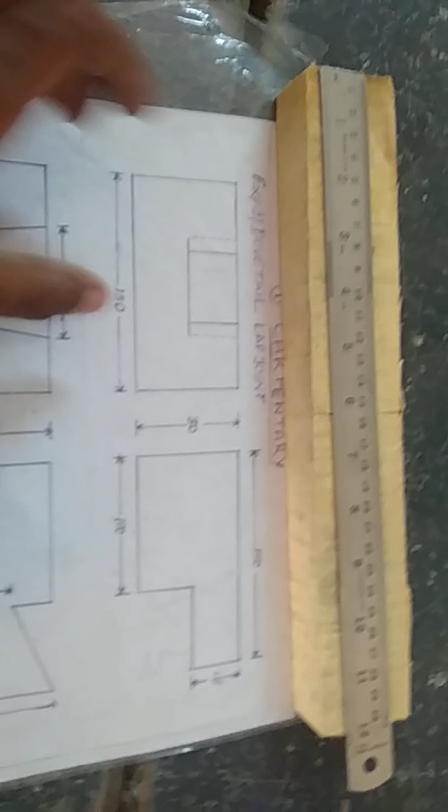So the workpiece is 300 mm. We have to cut it at 150 mm after the smoothing operation. We already know what the smoothing operation is: we do it using a jack plane. Next, after cutting this material, you will get two workpieces like this. In these two workpieces we have to do the marking for the first part.

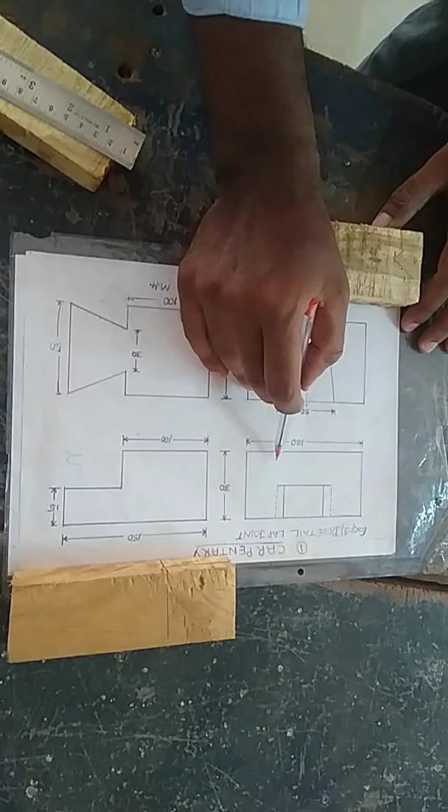We have to do the marking of the first part. How we can do that marking, we will see now. So in the first part, if you see from the front view, you will see it like this. We already know graphics and orthographic projection: in the front view you will get a position like this. From the top view, you will get the dimension figure like this.

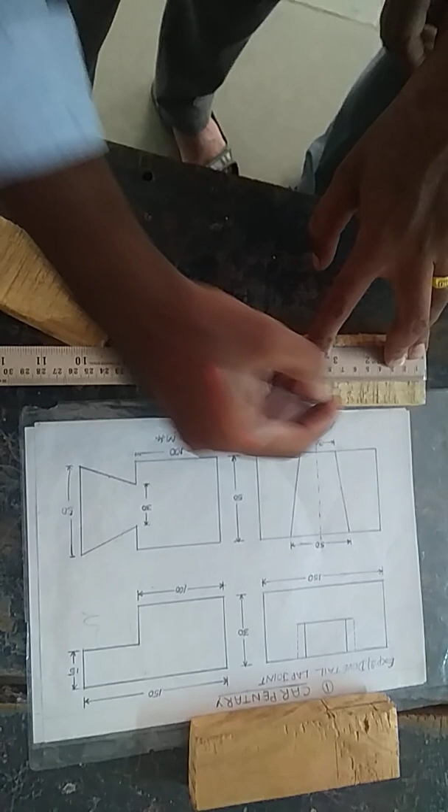Okay, now I am going to do the marking. This marking is very important compared to other experiments. In total we have a 15 mm dimension. In the 15 mm dimension, we have to mark the center point, that is 7.5, and make the line. From the 7.5, we need 50 mm at the top. So here we have to mark 25 on one side and 25 on the other side. So the total 50 mm is completed.

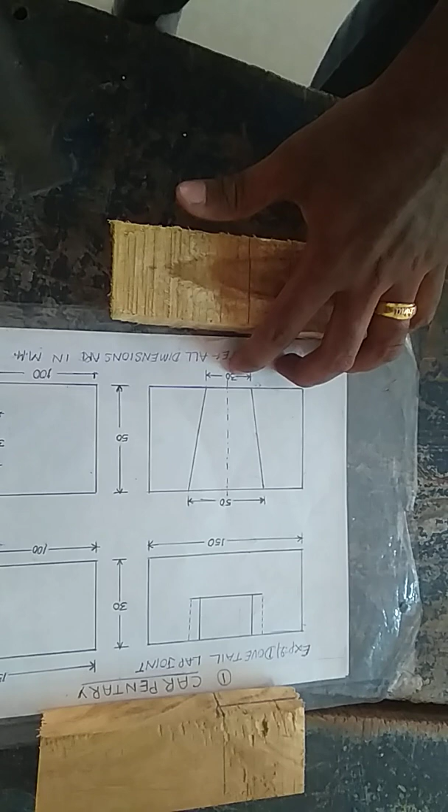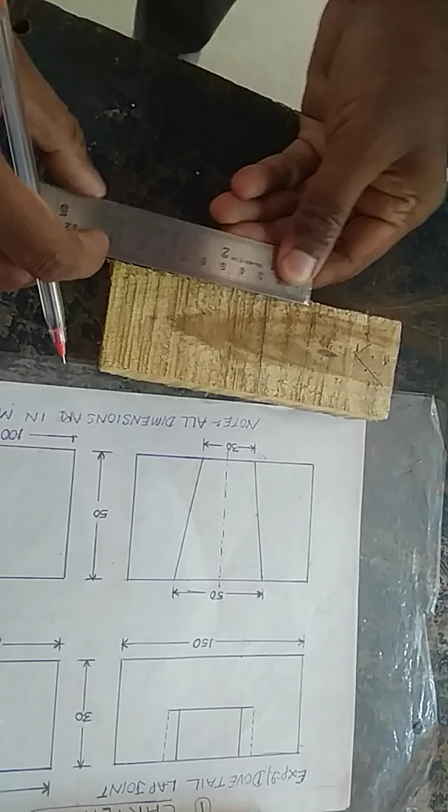At the bottom you can see a total of 30 mm. In the previous lap joint there was 50 mm at the top and 50 mm at the bottom, so we did the marking easily. Now one side is 50 mm and the bottom side is 30 mm. So we can do the marking like this: total 30 mm, 15 mm on one side and 15 mm on the other side. Now we can join these two points crosswise like this.

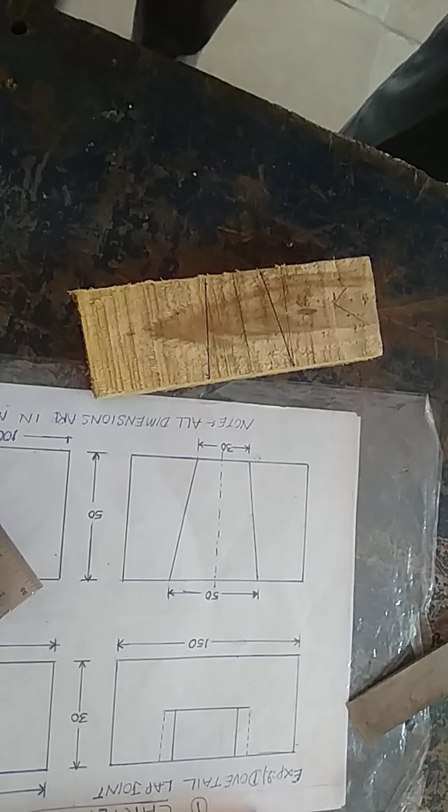So this is the marking procedure of the dovetail joint. If you do the marking properly, you can easily complete the process. Now you also have to mark up to half. In the front view, it goes only up to half of the total 30 mm, which means 15 mm. So you have to mark this 15 mm properly.

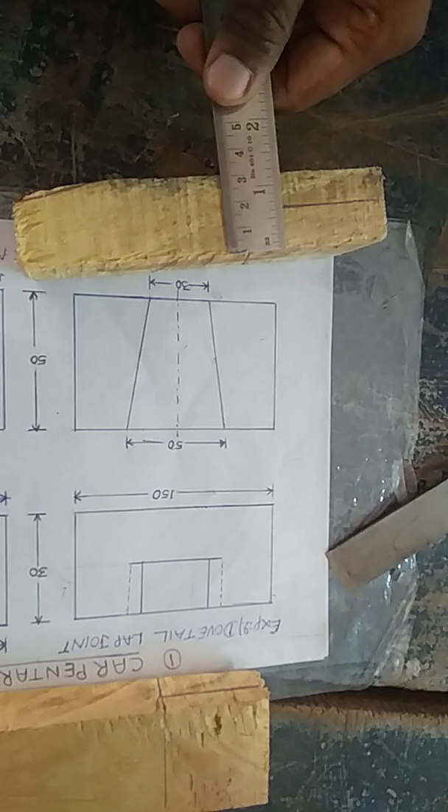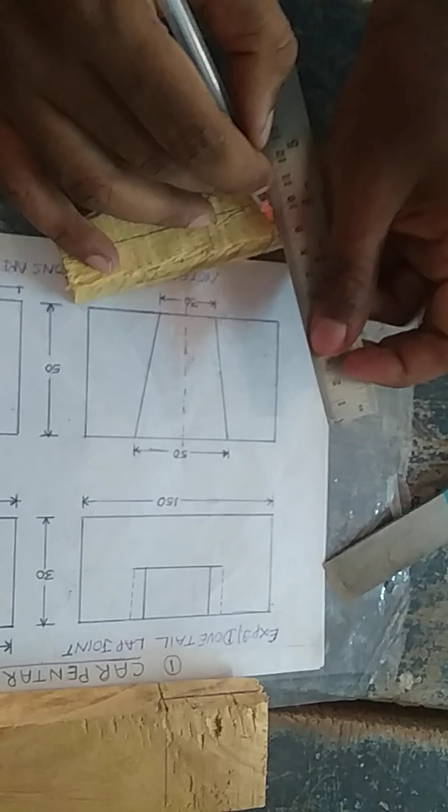Now you can join these lines. So we have to cut at this point. You also have to mark the opposite side, up to here. See the marking properly here: here it is only 30 mm, and here it is 50 mm. So you have to cut this way.

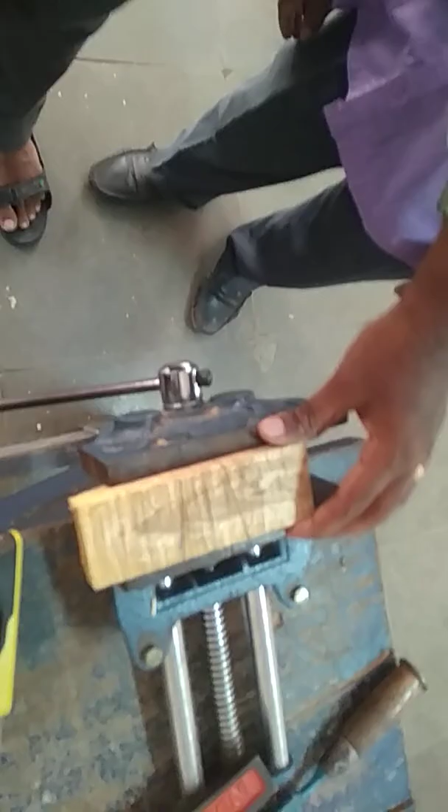You have to fix the workpiece in the vise. See here, you have to fix it up to this marking area, so that the marking area is visible to your eyes. Now you can do the cutting in a cross manner.

See, the workpiece is straight, but you have to do the cutting crosswise. Like that, you have to cut both sides, up to the bottom marking. Clear? After cutting with the saw, the material will be there and a gap will come here.

After that, you have to remove the material using this chisel. When using the chisel, don't go all the way here the first time. You have to remove 1 mm at a time; only then will it come out nicely. Otherwise the workpiece will be damaged. You have to start from 1 mm.

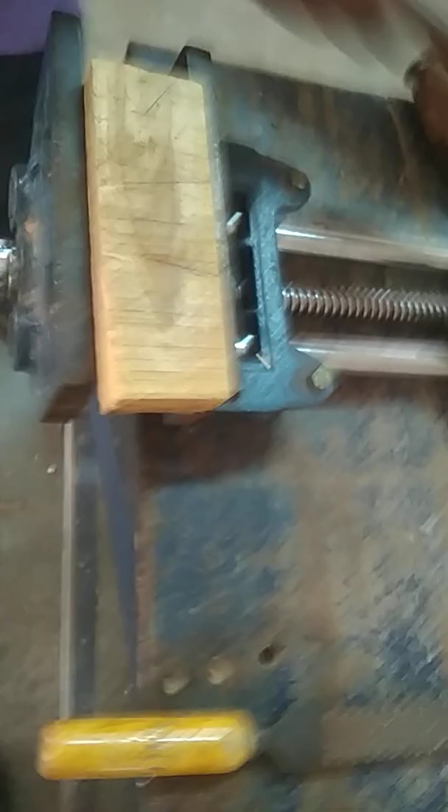After cutting, you have to do it like this. This is the mallet, and this is the chisel. We have to remove the material 1 mm at a time. Don't start from here; if you do, your workpiece will be damaged. So you have to remove it slowly like this.

So after completion of this work, by using this rasp file, we have to remove this burr area. We have to remove the burr area like this. Okay, then this surface will come very smoothly.

After the cutting and smoothing operation, your piece will become like this. See that one? Okay. So front view you can see like this. From the top view, we have to see in this particular dovetail shape. So first part is completed.

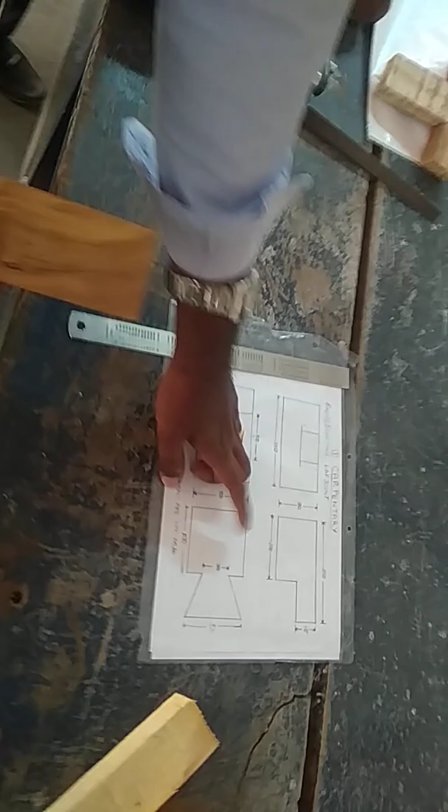Now we are going to do the second part. So second part, this is our second part. In this second part also we have to make proper dimensioning. Okay, we have to make the proper dimensioning. Marking is very important here.

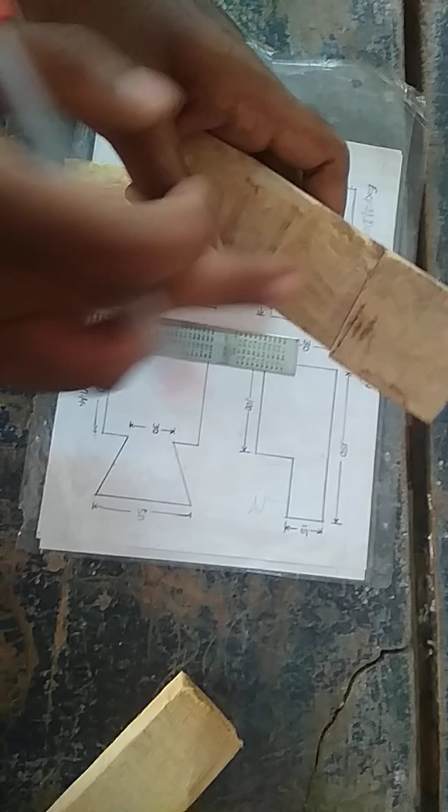See, this is our second part. From here, whatever things we did in first one, the same thing. One side is 50 mm, another one side is 30 mm. Same like that you have to mark it. So one side already 50 mm is there. Okay, already 50 mm is there. So leave it. But before that you have to mark the center line.

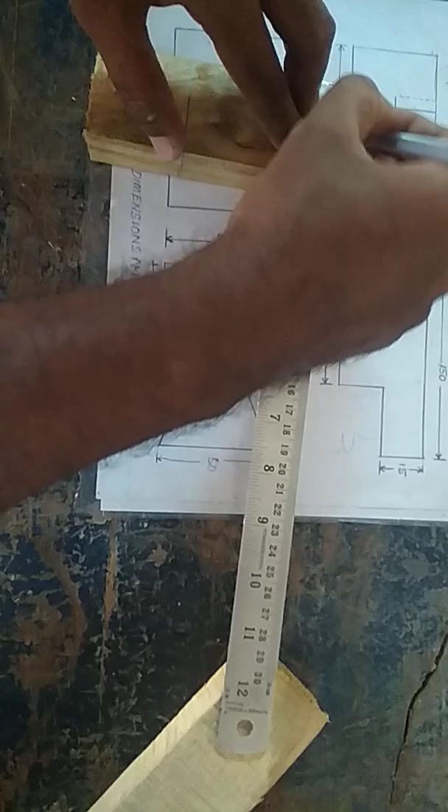Center line, it should be total 50 mm is there. 25 mm you have to mark as a center line. From the center line, 15 mm length you have to mark it. Okay, one side is 50 mm. In this side we have to mark 30 mm.

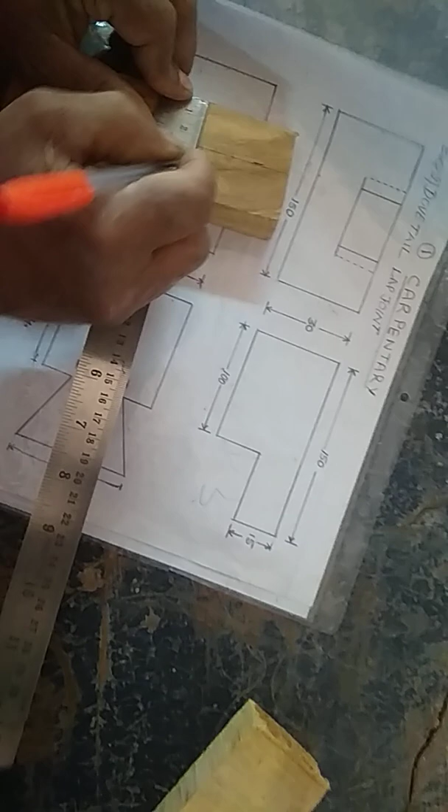So one side is 50 mm, 15 mm, 15 mm, 25. Center marking. One side is 15 mm. Another one side is 15 mm. Okay, like that you have to mark it, and you have to join like this. And you have to join like this.

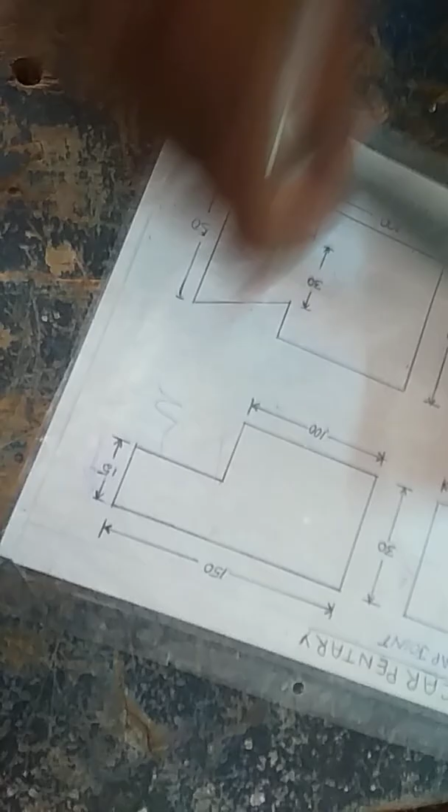This is the marking. Okay, here up to total 30 mm is there. So we need here 15 mm only. This 15 mm only we need. So that 15 mm we have to mark properly. Okay, up to this 15 mm. This side also. Both sides we have to do.

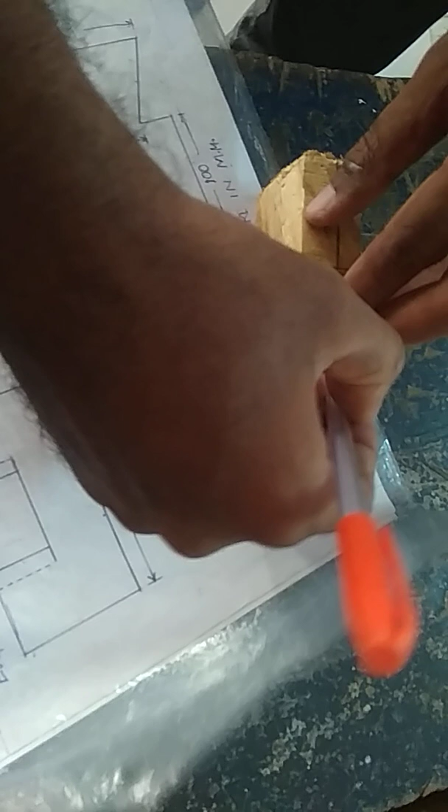Okay, after marking, you will get like this workpiece. Okay, you will get like this. See, same like this you will get. Now we have to remove the material. That is only our aim. So first we have to cut in this top of the plate.

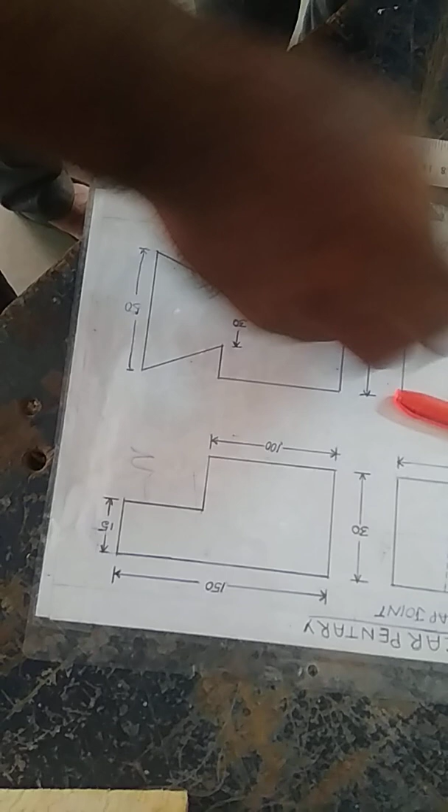See, after marking, you can rotate all four sides. You can see the line one side like this. Front side will be seen like this. Another one side also up to here you have to mark it. Top side. This is very important. This marking is very important in dovetail. Okay. Now we can see how we can remove the material.

So first, this is our marking area. Marking area we need, remaining parts, this part, the second part, this second part we have to remove. Okay, we have to remove. So I am fixing workpiece like this here. Don't put it. Okay. After fixing the workpiece, we have to cut in this area.

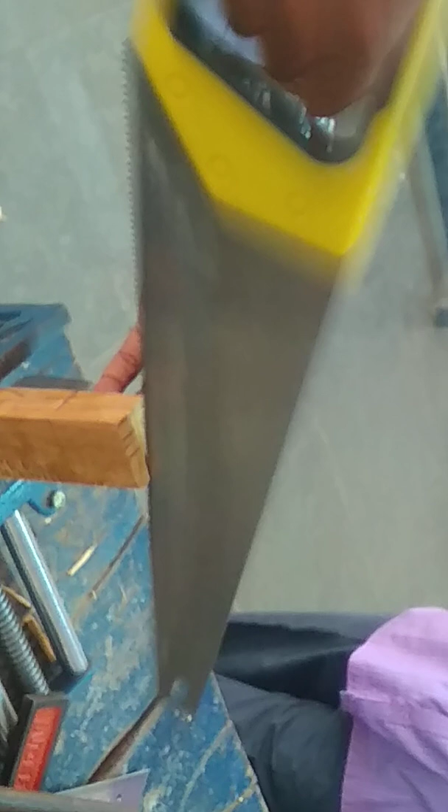Okay, we have to cut like this. So during cutting time, we have to stand like this. One leg is front and one leg is in back side. Then you have to cut like this. Then you have to make the angle of this blade also. You have to make some angle. See, workpiece and this angle, you have to make some angle. Then only it will be easily cut.

After removing this particular part, you will get this area only. This area, by using this chisel, we have to remove it. By using the chisel, you have to remove it. And then in this particular area also, we have to cut by using handsaw. By using the handsaw, we have to remove this particular area. By using this chisel, we have to remove this area and this area.

And you will get the final product like this. See, front area totally completed, removed. Then second area, in this particular area, we have to remove by using chisel. In this area, we have to cut by using handsaw. In this area also, we have to cut by using handsaw. We have to fix the workpiece and we have to cut it. And this area, we have to remove by using chisel.

Okay. So finally, we will get them like this. So the first part and second part, we have to make the joint like this. This is called as dovetail joint. As per our dimension, we completed our workpiece.